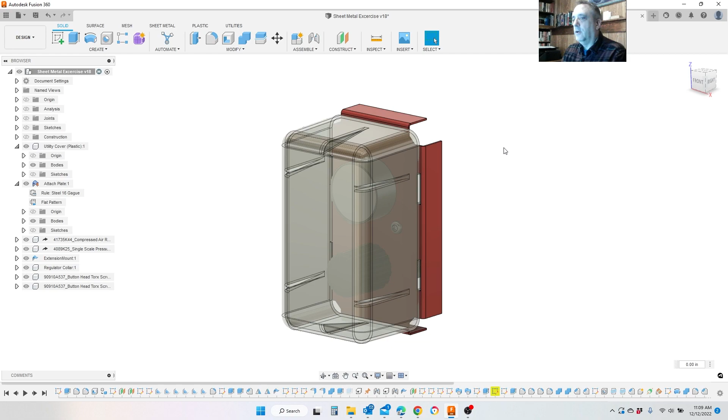All right, so what we have here is this design that I've already done. Basically what we have is some sort of manifold here that is attaching air inlets and outlets through a regulator and a regulator pressure gauge. There may be another gauge, of course, on the other side, so it shows the pressure coming in of a tank or etc. But this is just an example of covering this part of it.

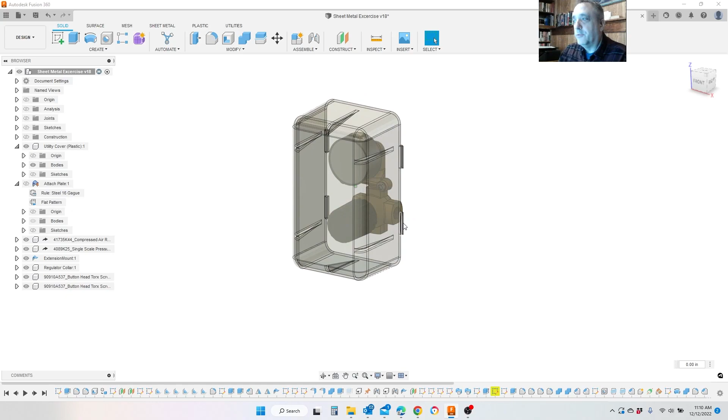And what this also has is there's a cover that goes over the top of it, and it has these little tabs here that are coming out to help kind of just engage it. So we have to make a part that can fit around these parts and be able to be this cap to attach to it. So that's what we're going to do today. As you can see, I've already come up with one, but we're going to go through this process to do one ourselves.

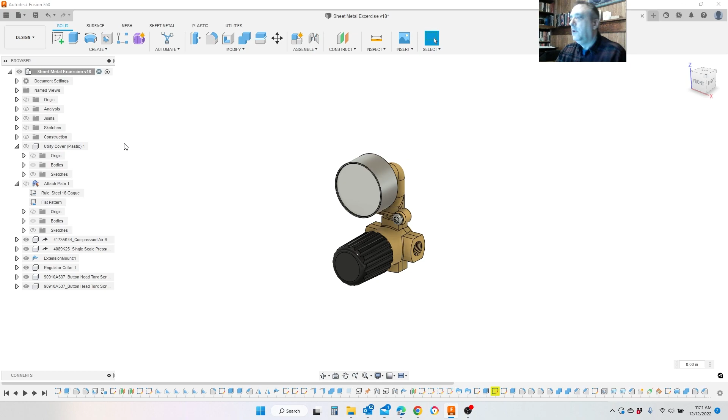So there are going to be some dimensions we need to know. We need to kind of know what the dimension is of this back part, so this can feed through. What the diameter of this pressure regulator is, the diameter of the screw holes and things of that nature. I've measured all that, so we'll start to put those things in parameters. And if you know me, I like to use parameters.

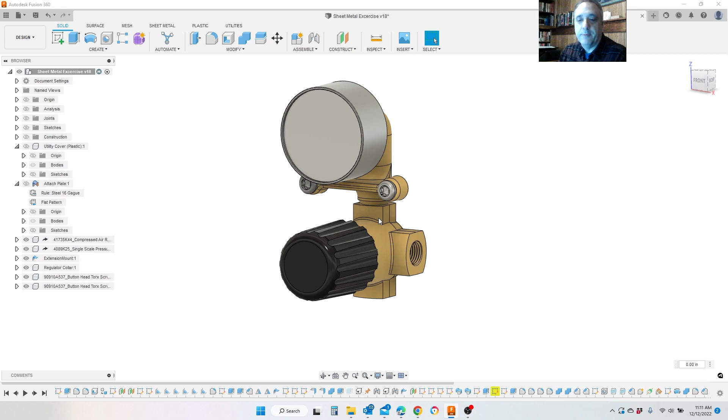Using parameters makes it easier for you to modify designs without actually having to dive into the actual drawings after the fact. Another nice, interesting aspect of parameters too, and even dimensioning in Fusion 360, is you can use equations. So we might use a little bit of that, but not a whole lot.

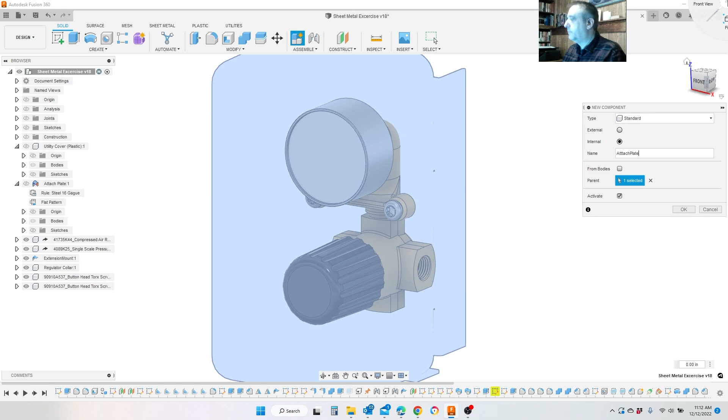So the first thing we're going to do is we're going to just define some parameters, but what I want to do is within this exercise, I'm going to create a new component. And I'm just going to make this part of the main sheet metal exercise. So here we have, and now we have that as our active component. That's mainly where we'll be working.

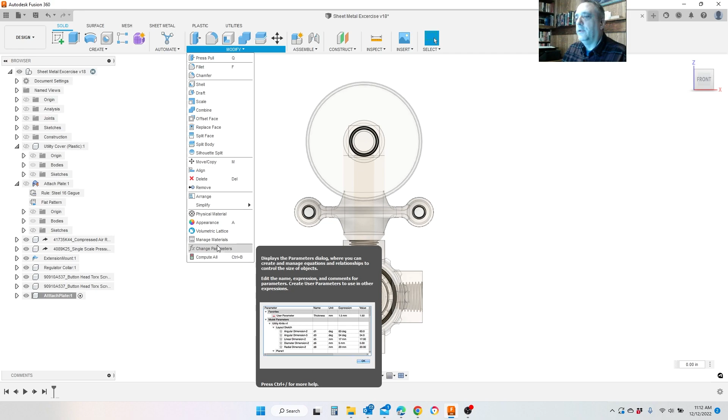So the first thing is under modify, we're going to do change parameters, and this is where I'm going to define parameters. If you've watched, I'll probably show it at the end, but I do have a parameters exercise designing a grommet you might want to watch.

But one thing to keep in mind is after you start defining some dimensions in a design and you haven't parameterized it yet, you actually can go into the model parameters under this setting and start giving them names and defining them, and then physically changing them within here. So if you don't start out that way, you can start to add them at a later time. But first, what we're going to do is we have several parameters that we need to define. I had to write a bunch down, but we'll get them in there as we go here.

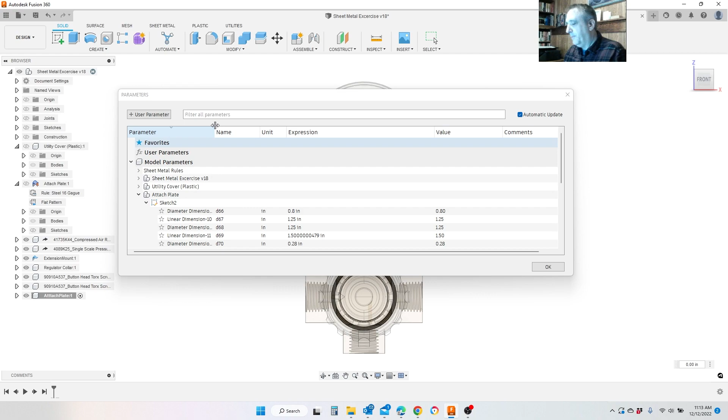So we're going to add a parameter, and this parameter is going to be flange height. Flange height is going to be the actual height of one of the flanges on the sheet metal part, and it's going to be 1 inch. So we know our hardware. The screws that are going to attach to that manifold are 1/4 inch screws. We're going to put 0.25. You say, hey, yeah, you need to oversize those. We'll account for that. But right now I'm just putting 0.25.

And then another parameter is going to be the dial diameter. This dial diameter is a diameter that's needed to get that dial through there. And you saw that it was square. I actually made it round. You could kind of make it square, but it would have to attach differently in that case because it threads on, it has to screw.

If it was square and it fit in there, then that manifold would have to be designed differently. So I just made it round. That is 0.80 inches. And the same with the regulator diameter. I measured that. 1.25 inches is enough for that to sit nice.

Let's see here. The other thing we need to know is the height and width of those tabs that are going to lock into this. So the tab height is 1 inch. And the tab width is 0.18 inches.

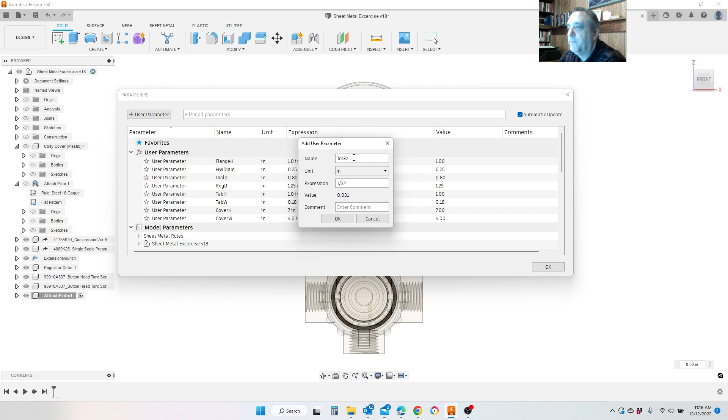And then another parameter we'll need to define that's not necessarily in here is the thickness of our sheet metal. So we'll get to that. As you know, the other thing I like to define is some sort of tolerance. So I'm going to call tolerance 32. That's going to be 1/32 of an inch. And then I'm going to add another one called tolerance 64, which is 1/64.

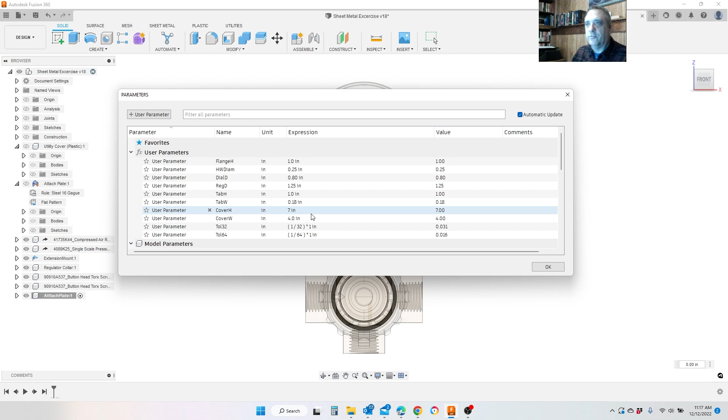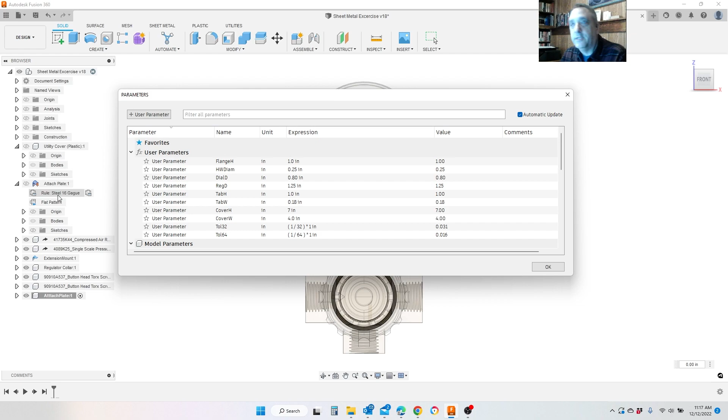Don't know how much I'm going to use these, but it's always good to build in some sort of tolerance. In fact, I know where I will use it is in that hardware diameter. There are a couple other dimensions on just putting things in the right location. Won't define those right now, but we'll define them later. The next step will be to start designing the patterns and things of that nature, and eventually defining the steel gauge. The steel gauge in this case is going to be 16 gauge, roughly 0.06 inches. So we'll get to that point.

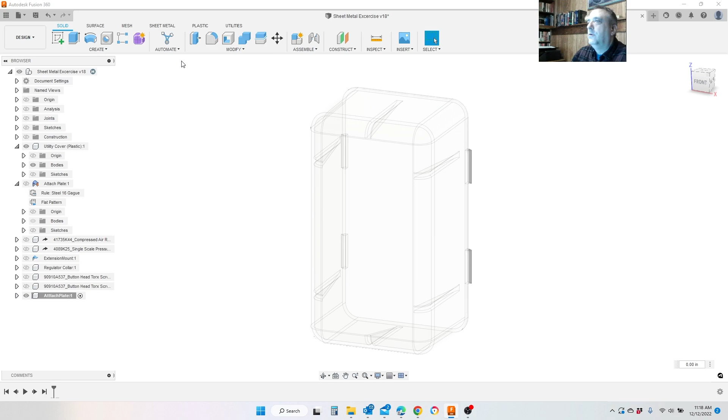All right, I'm going to turn off all of my extra stuff here, except for this utility cover, and it's very faint on my screen. It is clear, so it's showing up even clearer than normal, but we're going to use that to define some of our boundary and understand where some of our features are at. So first thing that we're going to do is create a new sketch, right at the boundary of the bottom part of this plastic cover, which happens to be at that axis.

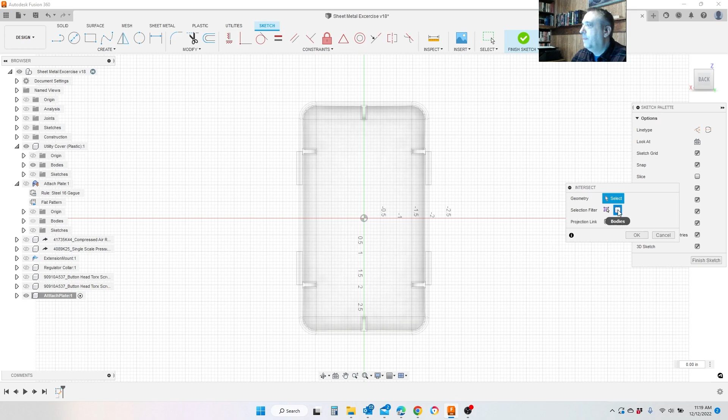And instead of defining the height and width of this box, I'm just going to create, project, intersect, solid model. I'm going to keep that link, and I'm going to grab those lines. So I've grabbed all those different lines that define the outline of this plastic cover. So we can then just turn this off so we can see what those are. So we've got that outline already.

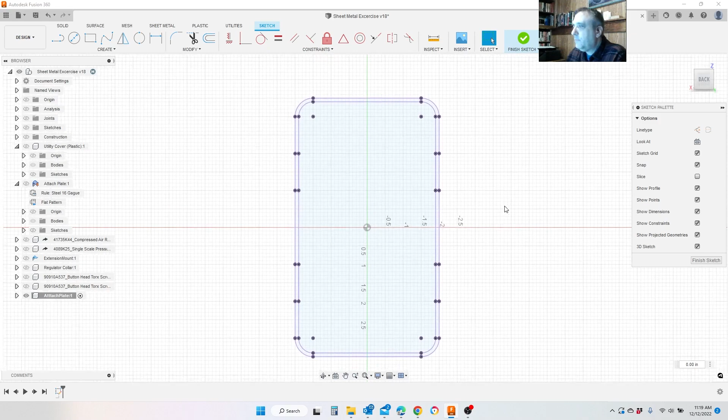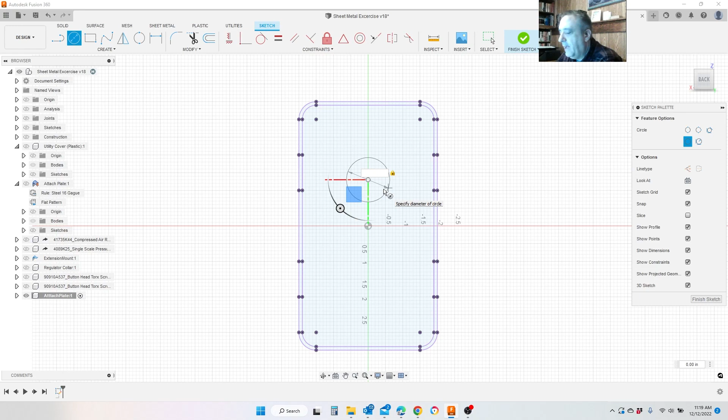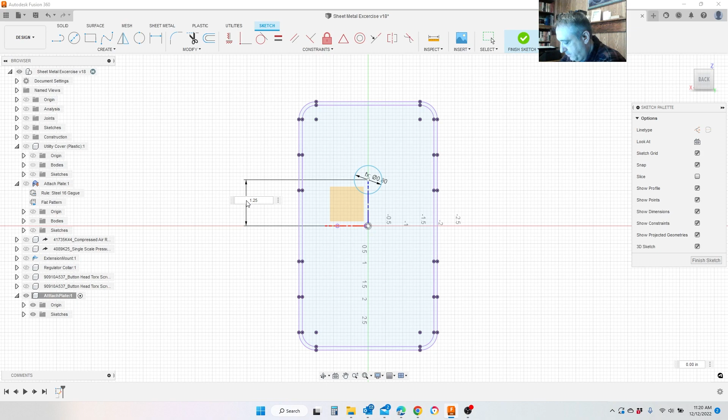So that's good. We have some features that we need to define on this that we're going to be cutting out. One is where those tabs are going to be fitting in and where those holes are going to be at. So let's do the holes first. So right up from center, there's going to be a hole, the dial diameter. Let's make sure our axis is showing so we can reference off of this. Sorry, it was 1.25 above at 0.8 diameter.

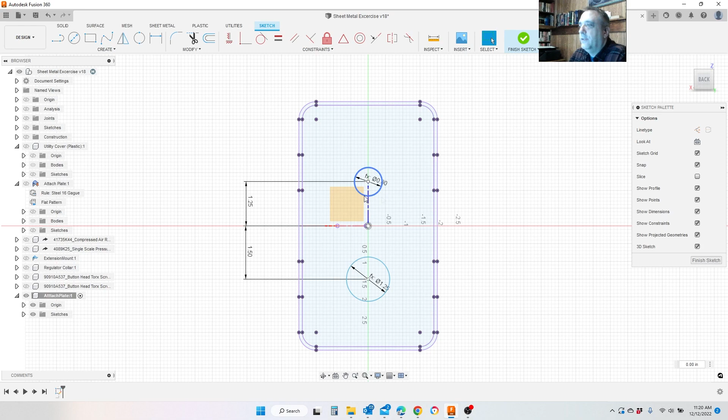And then we're going to do another one below, which is going to be the regulator diameter, which is 1.125. And this is going to be 1.5 inches. Now you'll see that I still don't have a defined circle. This is because I can move this still right to left. I have to define it off this axis. One of the easiest ways to do that is just to create a reference line center to center from top to bottom. And then we're just going to make these collinear. And then we're going to do the same thing.

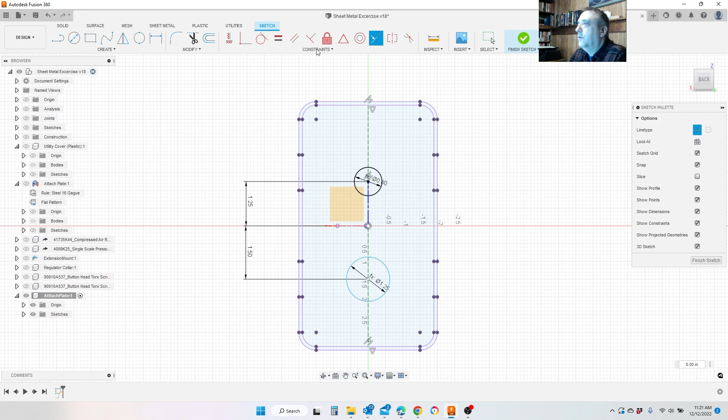There we go. So we have those lines defined. So we have a spot for our pressure dial and a spot for our regulator. Now it's the hardware locations, which are just right along here. Turn off the line type, make sure we have a regular line. Now you can do this as a point and a hole, however you want to do it, but since it's not a threaded feature, I just like to do a regular circle.

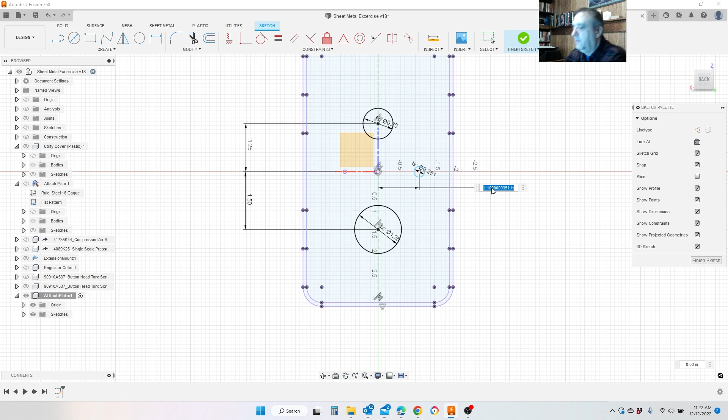So this is a hardware diameter, but plus Tol32, 0.281. And then again, same here. We're going to define the distance. This is from here. That distance is 1 inch. And just like the other one, we should put a reference line from center to center. And then we can make this collinear.

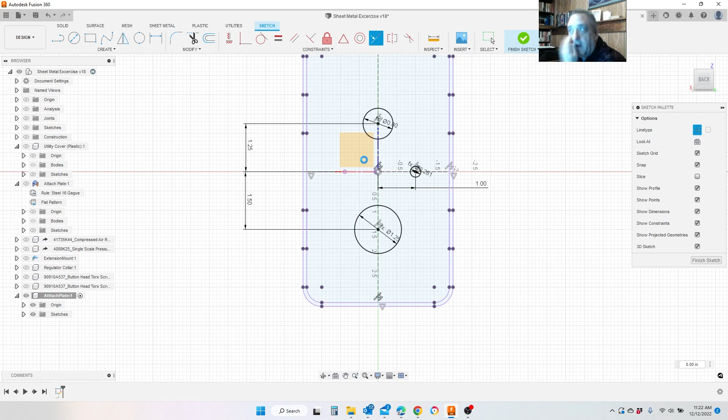And it'll be defined. The other hole could just make that, but what I'm going to do is I'm just going to mirror it. That way, if I change the diameter, it will change the other diameter in the right location. So I'm just going to save this. All right, so we have our holes defined. And we don't need these quite yet. We will get to those in a little bit.

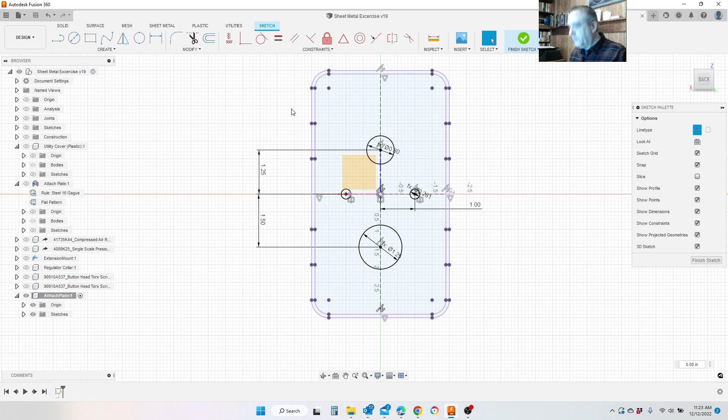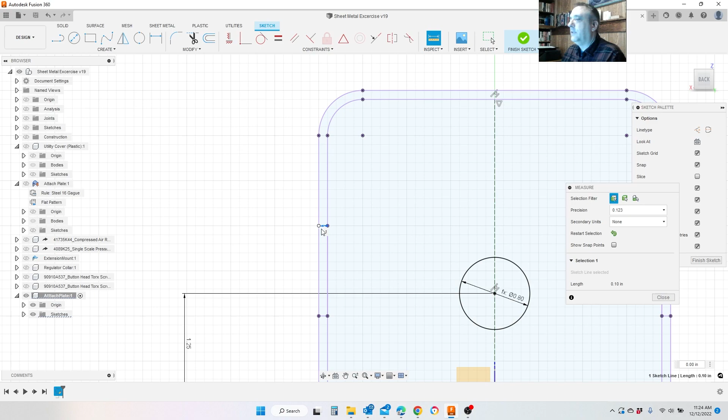But the next thing we're going to do is the flange, defining this flange. So this is a unique feature. Profile right here, and that's the width of that intersection that was there. It's not necessarily the total width of the flange itself. If you remember when we did the tablet was 0.18 inches. If we inspect this, it's actually 0.1 inches because that's a narrower part.

That's part of that flange, but the biggest width of that flange is actually 0.18 inches. And it goes 0.18 inches from this line out to here. But I need to have a little overlap for it to hook into. So we're actually just going to make a profile. Probably should not have that. And we're going to add 0.04 to it. And now 0.04 on both sides. This should be 0.18. So it'd be just tight enough to fit in there.

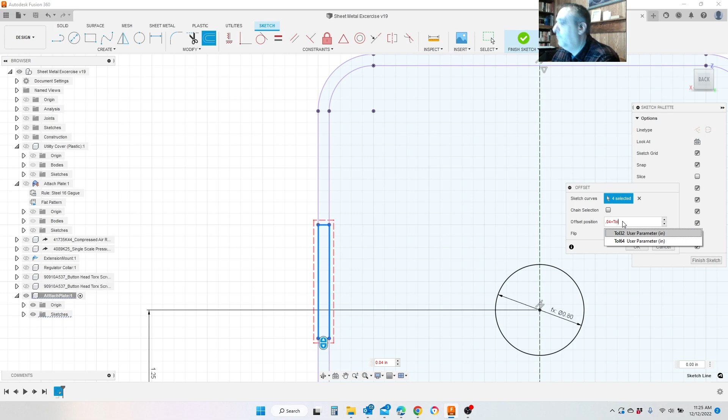And in fact, if we wanted to, we could add a little bit of a tolerance. Let's do 64. And I did not want this to be a reference line, so let's just change it back to not being a reference line. Now I have that, and I have this in all four corners. Nice thing is it's all symmetrical, so we can just take this and we can just do a symmetrical.

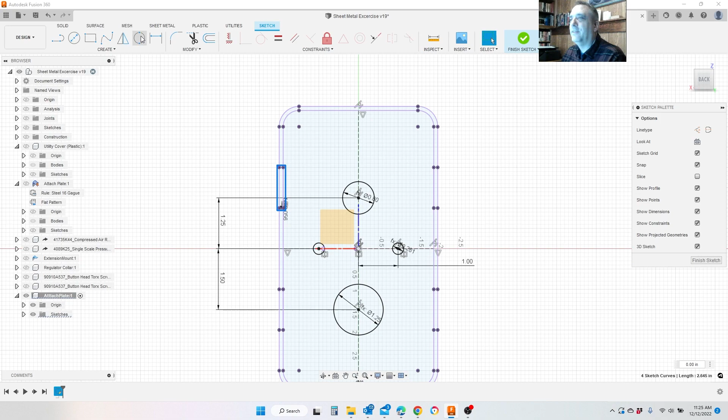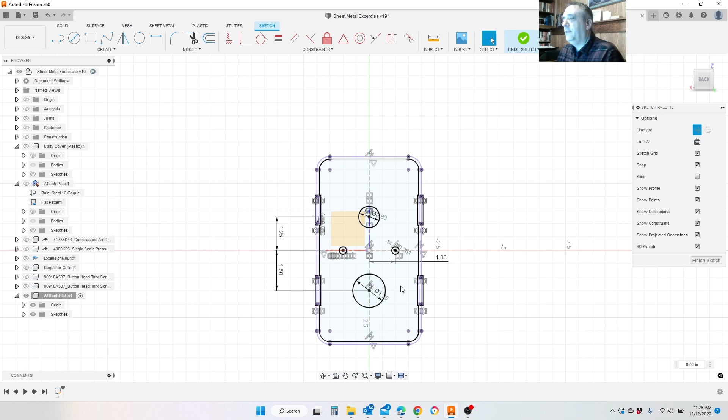So we defined all that geometry. The next part is we're going to create different flange geometry to actually create the flanges in the sheet metal part. Now we're going to need a new sketch. And this outside face from this side is where our utility box is. And our flanges are going to be down on the other side. So we need to create a profile from this direction and this direction and this other direction in order to create this.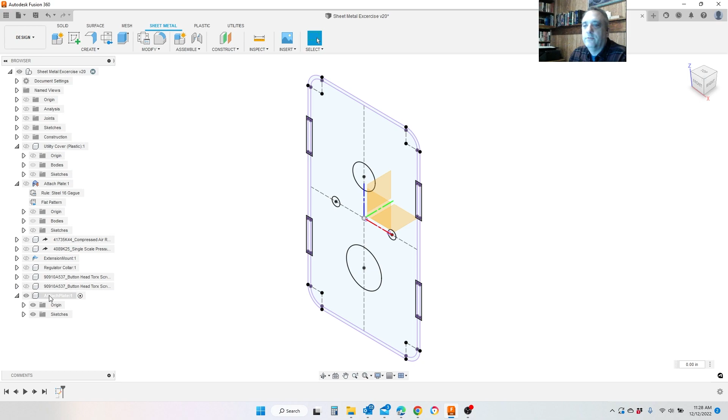But before we do that, we want to go into sheet metal. And we are going to create a sketch while being in the sheet metal design space while we are in this component, the attach plate. So now we're going to do our geometry from here. So we're going to need to do a drawing that can be right in this midplane. So let's start here.

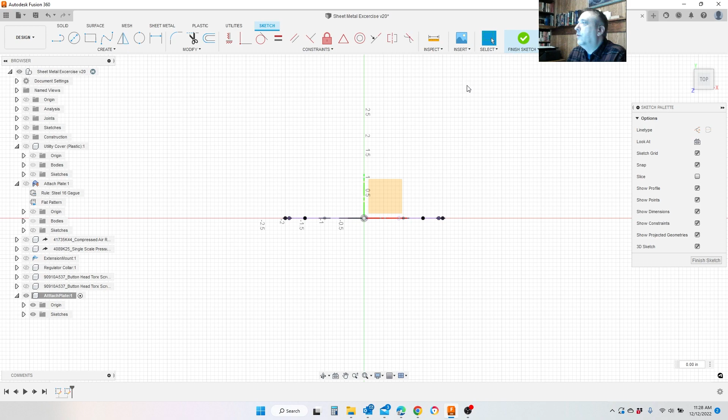And we are going to do, those are reference lines. Okay, so let's do this. I'm going to go out to here, here's where I'm going to need it. Cover width divided by 2 plus overlap.

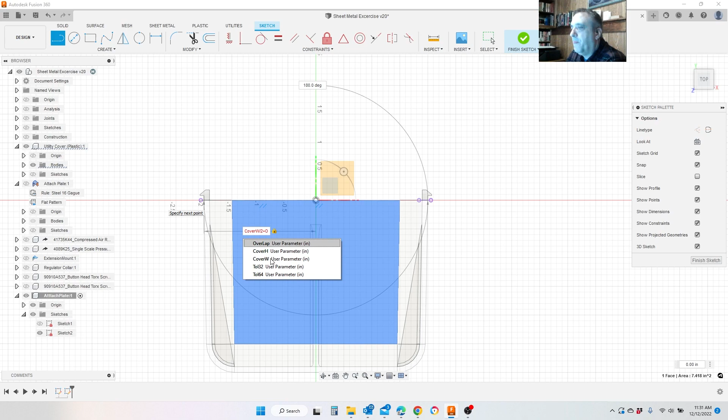And then we're going to do this up, and this is going to be flange height. And since I only did half of it, we're going to mirror it. So let's turn this off.

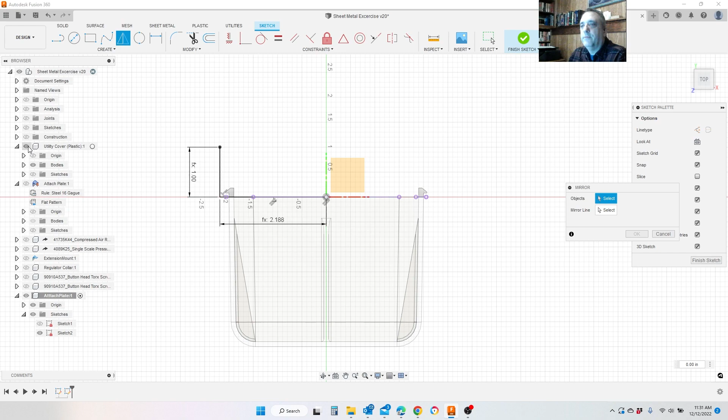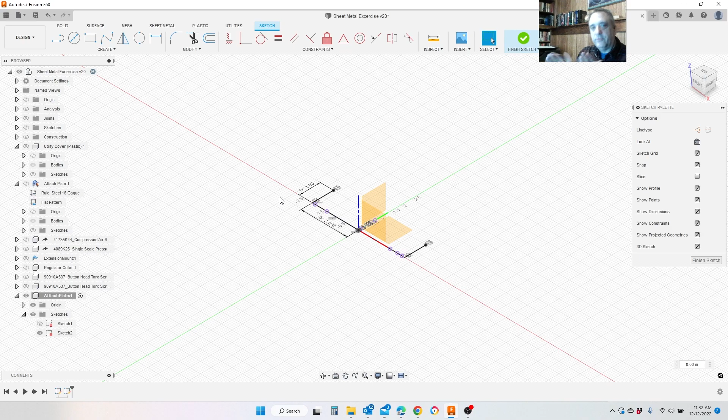Okay, so I've created a very basic profile, corners and all, no radiuses, nothing, with what that basic shape of the flange is going to be. But I'm not only going to bend this around 2 sides, I'm going to bend it around 4 sides. So we also need to finish this sketch. And if we bring this cover back in, you can see how this is going to create a sheet metal flange in this direction. Well, we also need to do one in this direction.

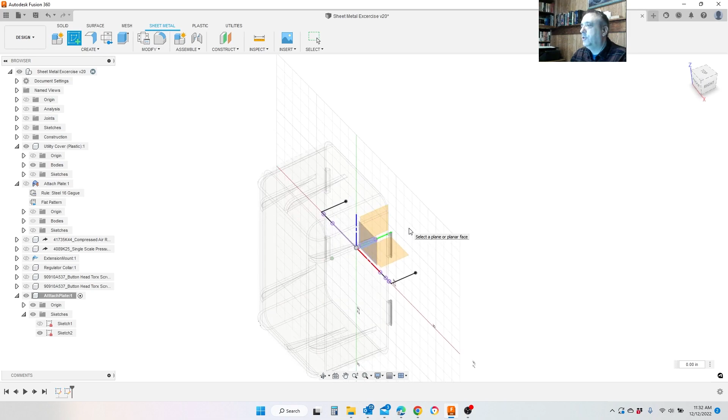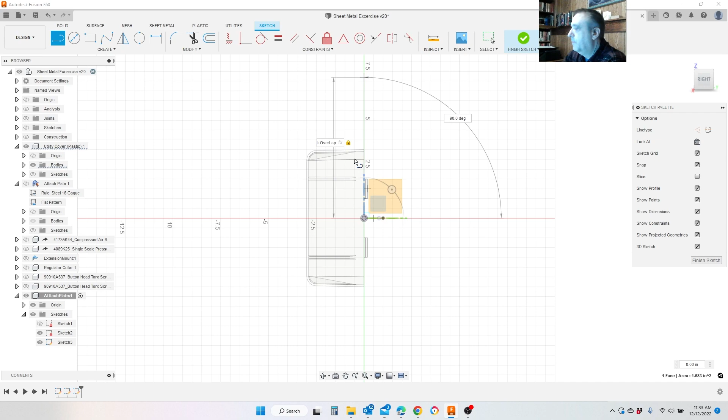So we're going to do a new sketch along here, and we're basically going to do the same thing. We're going to go from center up, and this is going to be cover height plus overlap. Oops, sorry, cover height divided by 2.

Finish sketch. So here you can see I have 2 sketches. Usually when you're doing sheet metal, when you have a simple profile like that, you basically are just going to do that profile, you're going to extrude it. You can add hole features on the flat pattern or on the shape itself. You do have to keep in mind though, even flat pattern algorithms take into account stretching and things like that on where the part goes. So if you add your features to a flat part and then you bend it, those locations might change.

So it's better to add the features to the bended part and then flatten if you can. Some complex holes and geometry might have to be put in on the flat pattern, like if you have a slot that you bend right in the middle of. But here I have flanges in 2 directions, so you have to do both of those operations and then combine the part and then flatten it out.

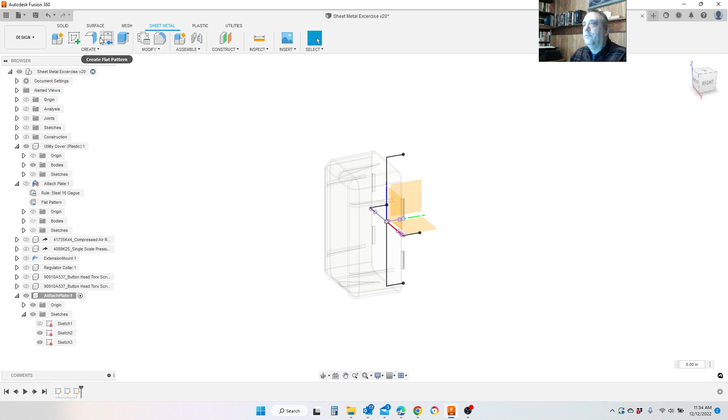So we're still in the sheet metal part, and so the next thing we would do is we're gonna create a flange. But we do also want to make sure that we have the right rules in place. And I'm going to just create this part just the way it is right now.

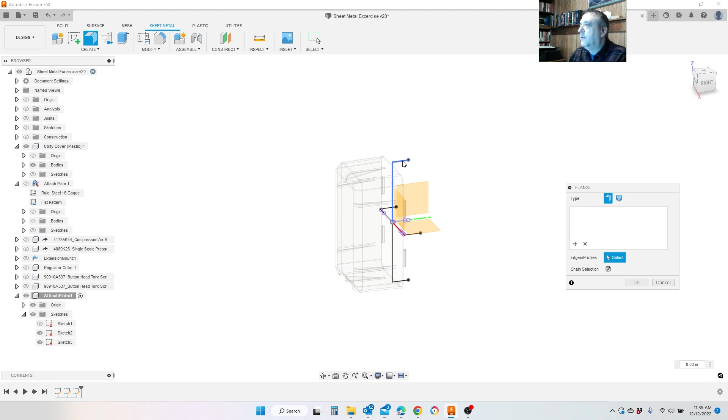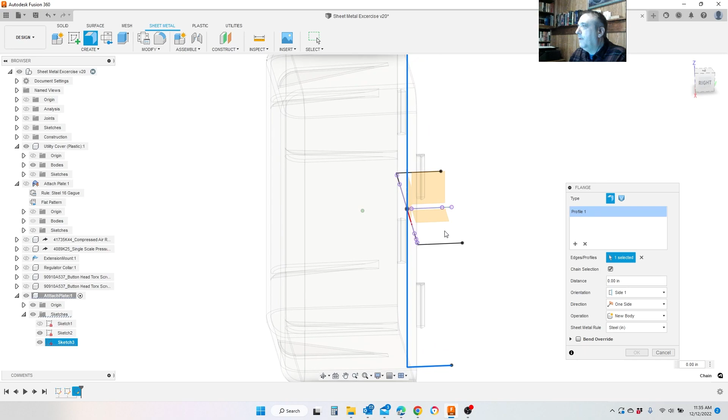First thing is I'm going to create this profile, and you can do a chain. If you do chain, it's going to go to a certain point, try to do the whole thing. Now, once I have the profile selected, you can see that it has an arrow on both sides, and there's a couple different settings you need to keep in mind.

We're not going to talk about lofting edges at this point, but just straight up just doing sheet metal. So one is the distance. You can define the distance in which you want to pull this part, and you can see it automatically creates the radius, it automatically creates the thickness. And we haven't set those settings yet, but it's defaulting to just the regular default rule and the distance. But just like any solid model, you can also do it on 1 side, 2 sides, or symmetric.

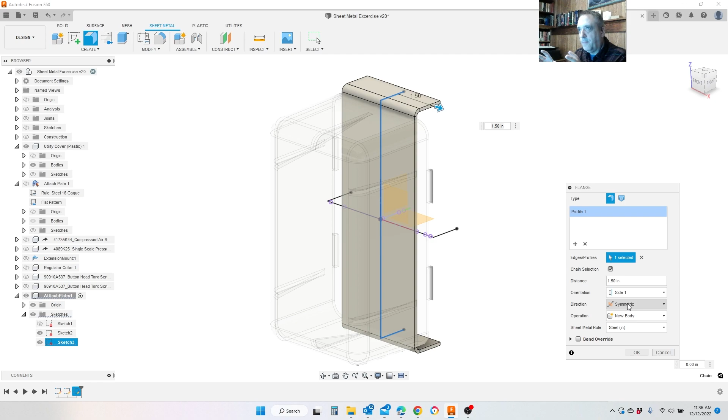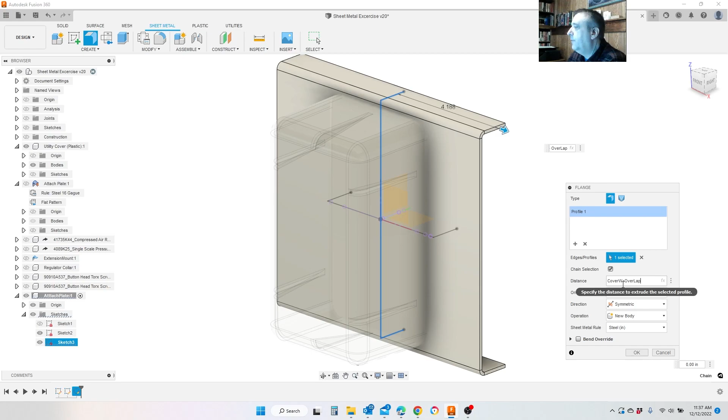We're going to actually do it symmetric, and we want to do it that total distance of our cover width plus the overlap. So I put that in, and then we can actually put that definition in here: cover width plus overlap. And I do need to divide this by 2 again. Unlike in the solid model thing where you can do a solid model, it's symmetric and you can define whether it's the extent or on each side, this does just symmetrical the total width.

We are going to create a new body at this point in time. And here you see the sheet metal rules, and there's different rules in here that are defaults: steel, stainless steel, aluminum, steel, inches, millimeters or inches. I have a predefined steel 16 gauge that we can pick.

There is a place we'll get to, I'll show you, where you can define your own things. Now I will say this, I haven't figured it out yet. These rules are per drawing, they're not per the system, so you probably have to go into a library or somewhere to define the actual gauges that will show up all the time in all of your drawings. So this is specific to this one.

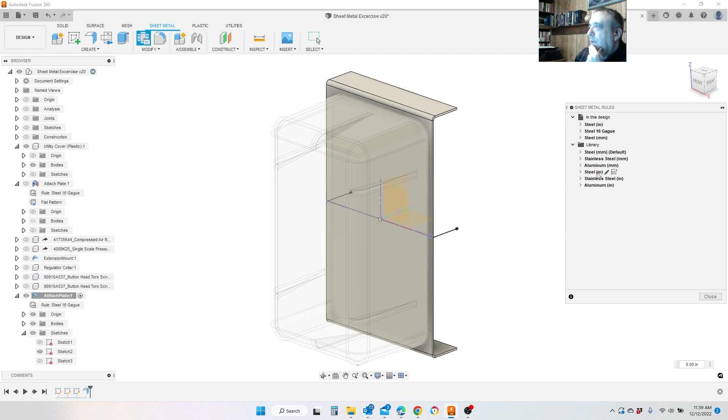So if you want to modify the sheet metal rules, we can go to modify and click up here, right next to the fillet. Here's where you see what's in the design and what's in the library. You can go to any one of these that's in the library, let's say steel inches.

You can say this is my thickness, this is my K factor, and then just leave thickness the way it is. I usually put the name 16 gauge or something in here. You can give different bend radius and settings and ways that you want to do that. I don't normally touch these.

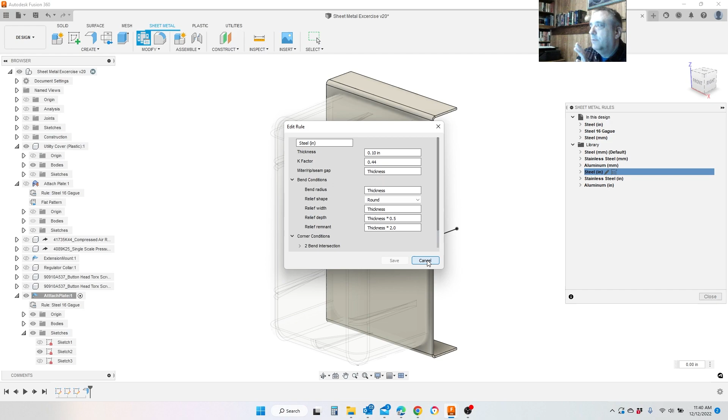There are books on sheet metal where you can get the K factor you need and the recommended one of these, but for now, for what we're doing, I think it's fine. That's how you change it and create your custom rule. Now we need to do the other profile.

We're going to do the same thing, this time for cover height. I just realized that I have a problem here.

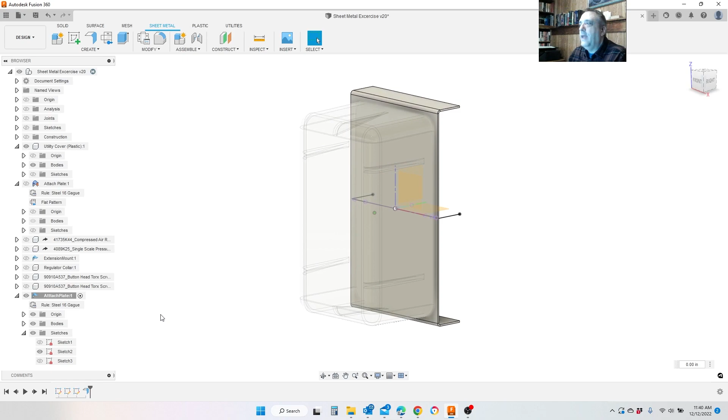So what's going to happen? I'll actually show it so you see it, because you obviously can't bend things into really close corners.

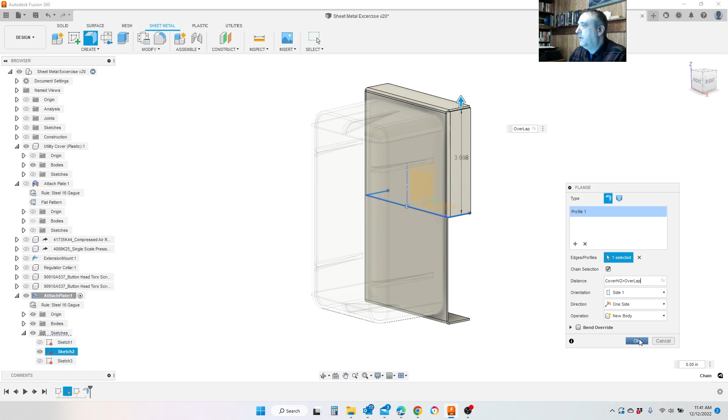So let's just do this just so you see what I'm talking about. Let's do cover width. We'll just do a new body, so you'll see how close this is.

We're actually going to merge these together, but we have to create offsets so they don't meet exactly in the middle. So we have to leave room in there.

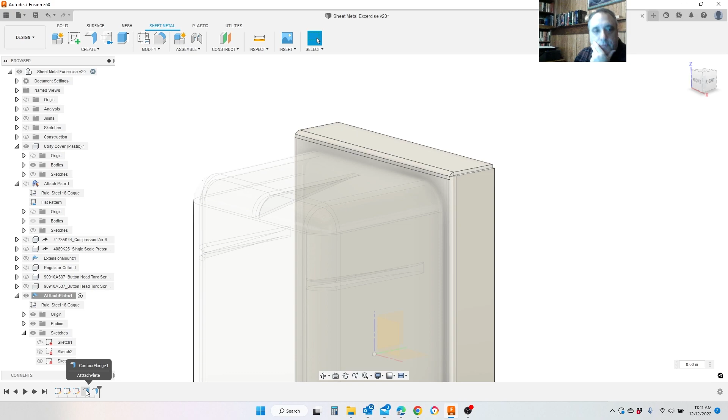Let's change our sketches, or not necessarily our sketches, but the distance that we pull those flanges. Down here in the history we're just going to right click and edit this feature, and get rid of the overlap part, because we did account for the overlap we needed when we defined these flanges.

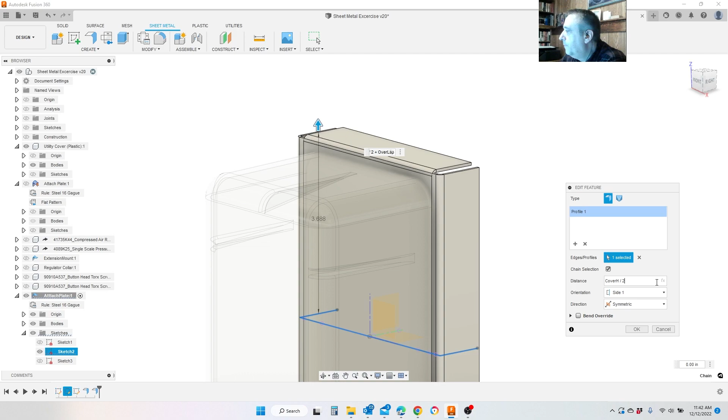Let's do the same thing with this one. We're going to get rid of the overlap. Nice, okay.

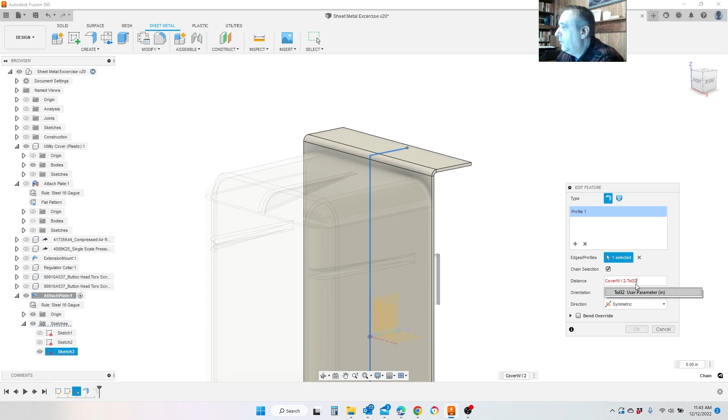In fact, if we want to even give it a little bit more, we can do it Tol32. And the same thing, Tol32. Okay.

Now we have two bodies that are, as you can see, sheet metal parts. So if we combine those - under modify there is no combine here. You actually have to go back to solid model and go to combine.

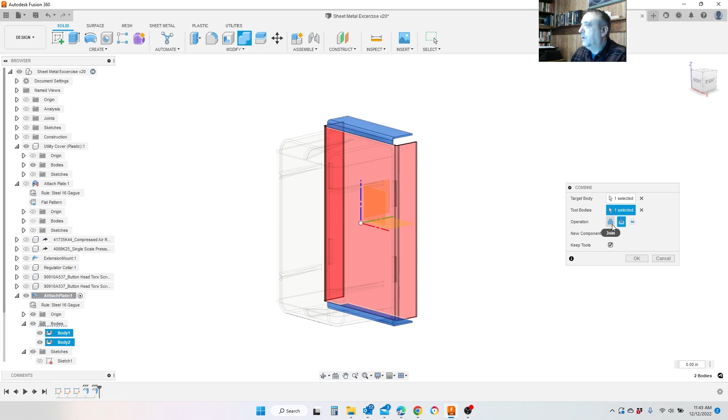We want to combine them. We do not need to keep both bodies, so we're just going to not keep tools. Now it's created a single body, which is still a sheet metal part.

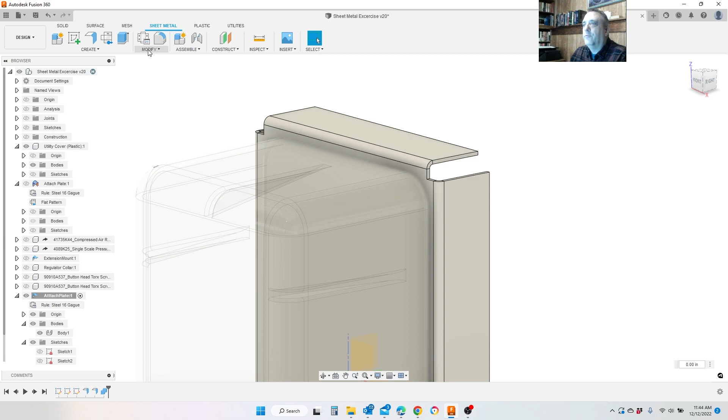I would like to now do some modifications, putting in the holes and everything that we need. First thing, we're going to put a couple chamfers in here.

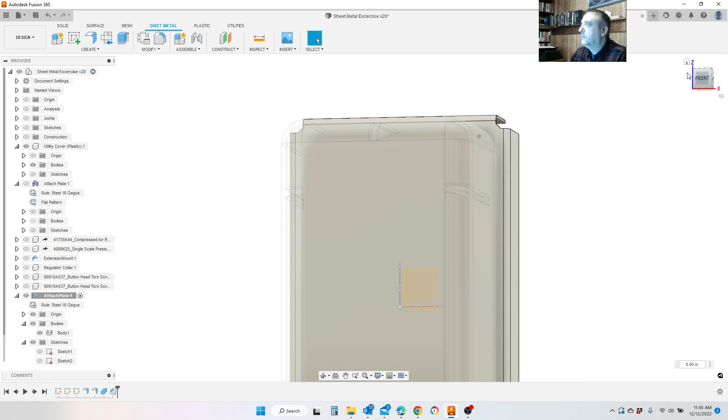Now we still have this other sketch. We're still in sheet metal. We're going to extrude, and let's go to the back side here for all of our holes.

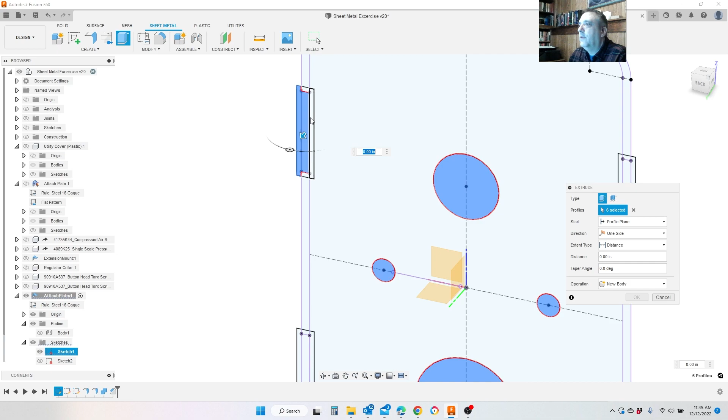Let's remove our body for now so we can see what we're picking. We want to get all of this. So here we have basically our part.

Before we do the flat pattern of it, let's just give it some color, physical material. I do recommend that if you know what metal you're going to be using.

I'm picking metal, and it's going to be steel. I don't know what kind of steel, so we'll just do steel. Drop that on there.

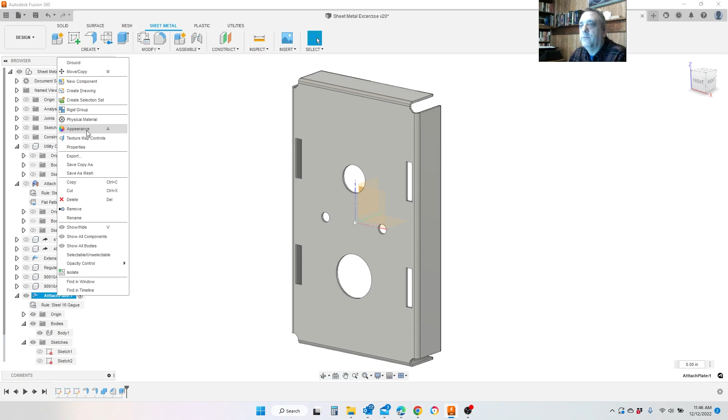Close, and then let's say we're going to paint it. The appearance - instead of the red like I did before, here you can just do different textures and things like that. But let's say we're going to make this green.

Or maybe it's a regulator for oxygen. I don't know.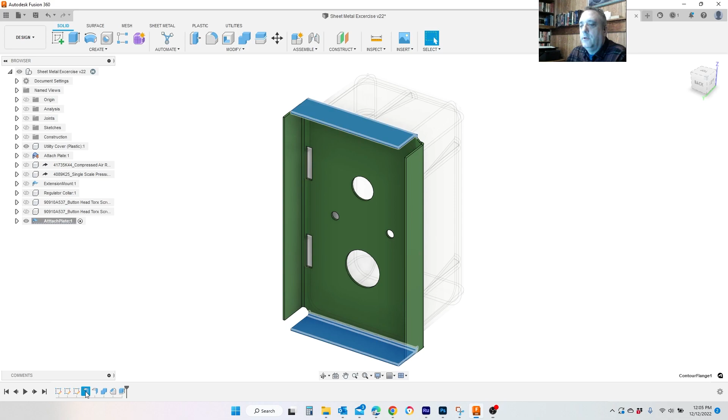One of the other things you want to look at closely is this setting where it says side 1, side 2, or center. This is defining on what side it's going to put the material—on side 1, the top side, side 2, the bottom side, or is it going to center over the two?

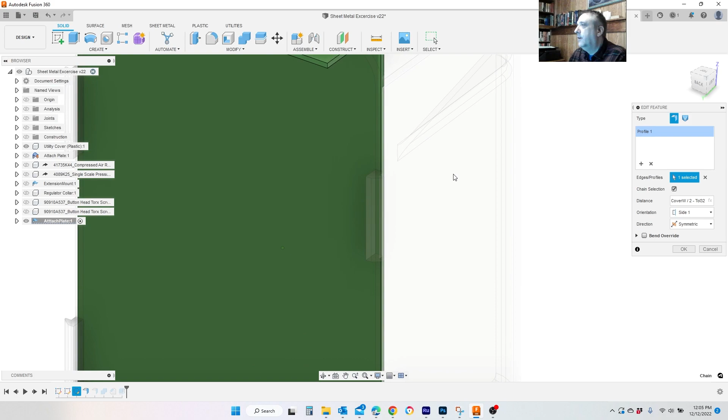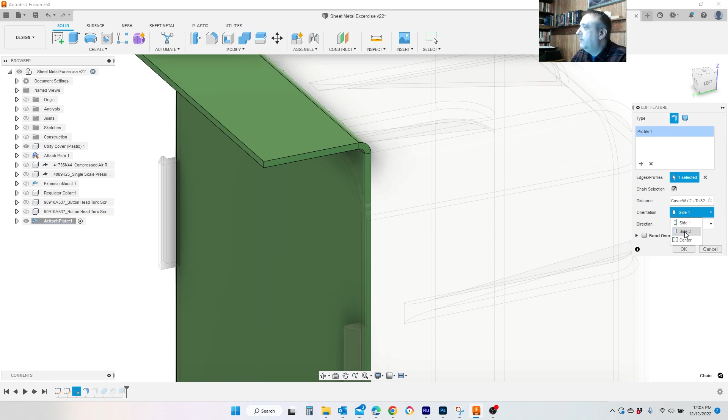As an example, if we select side 1, you can see that it's actually pushing up into the cap. That's not overly important because this cap moves back out of the way—it's not a solid piece, I'm not building it into anything. But if I select side 2, it pushes it down on the other side. If I do center, it's going to make it symmetric.

So if we go with side 2, it's going to do this. Let's make sure they're both side 2s.

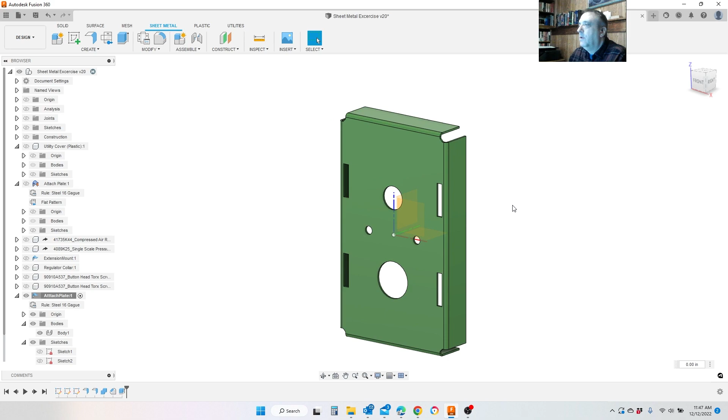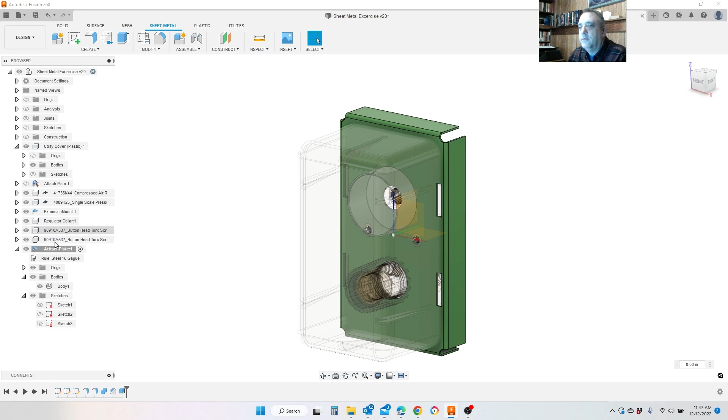Let's bring in our other components and see how things line up. So we have our cover—we won't do this attach plate, that's the old one. We have our regulator, collar, hardware. Let's turn this one on. So here we have our cover. Everything seems to line up.

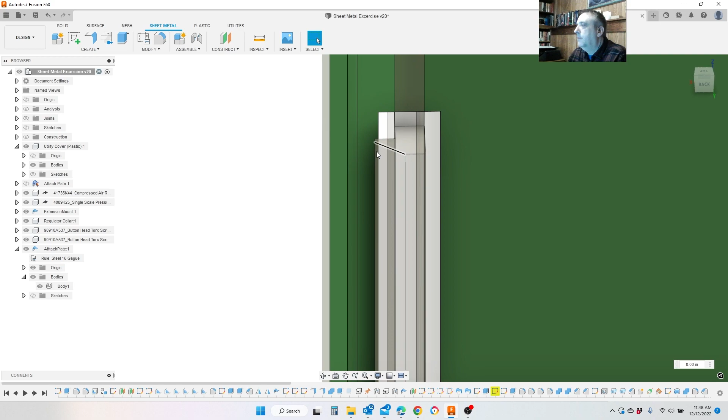You can see here where this is wide enough for it to get in, but there's a little bit of overhang for it to grab. Could we make it a little bit smaller? Possibly, but it should be enough. We want to just squeeze it a little bit to get it to pop up.

Next thing is we want to create a flat pattern of it. Once we're active in this body, we'll select flatten. It's going to say select the face that we want to be stationary—this is the face that's face down, like imagine the sheet of metal, it's the face down part. You want to be face down. That's this face. Do OK.

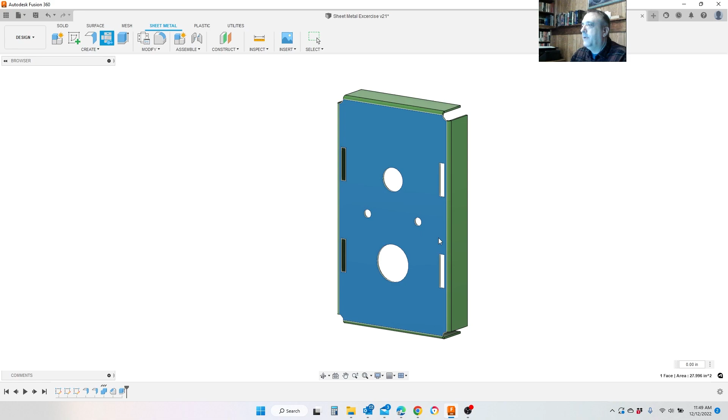So you'll do a drawing and you'll want to define the thickness of the material, the type of the material, the finish if there's any, not necessarily finishing at that point, if there's any processing that gets done afterwards prior to it. But you will need to say that this is this radius bend, 90 degrees, because you can do bends—we could have made those flanges instead of 90 degrees, maybe 85 degrees or something like that, and then you'd have that kind of bend.

But that's your basic flat pattern, and I will give a link to an organization where you can send them a step file of a sheet metal part, and it will flatten it out for you. You can say how you want it finished, and they will cut them out and send them to you. It's a really nice organization. There's a few of them out there, so maybe I'll try to hunt down a few of them.

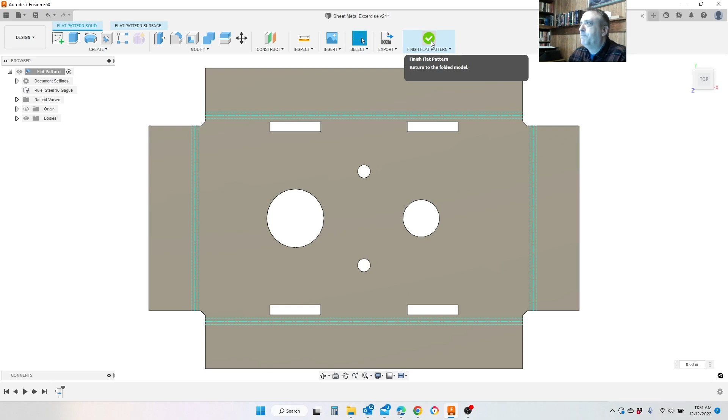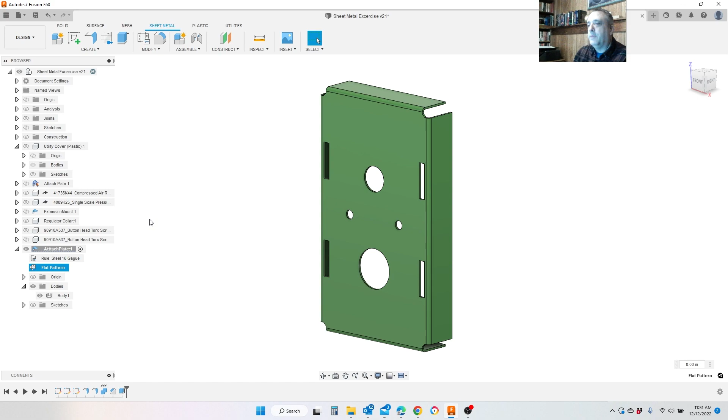Yeah, so that's really the basics of creating a flat pattern sheet metal design in Fusion 360, especially doing it around the design of other components. I'll give you some examples of these components: the compressor,

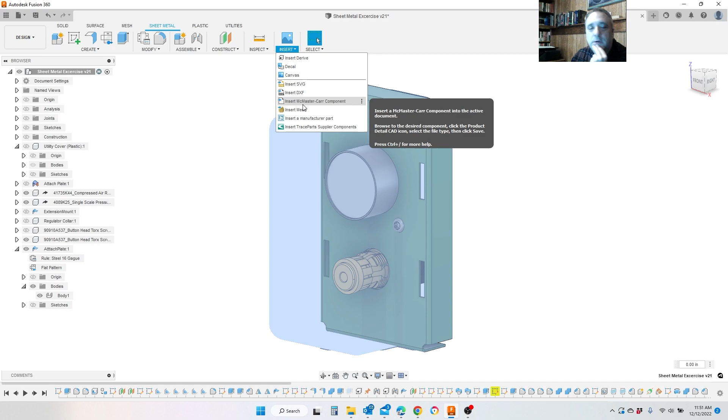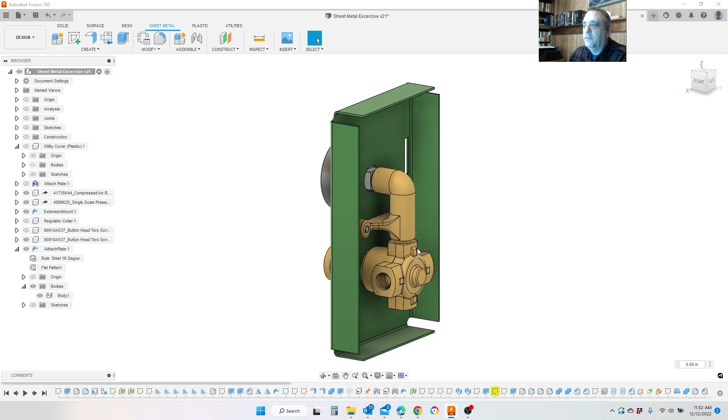regulator, the dial, the fasteners—all of those parts I got at McMaster-Carr, which you can actually import directly into Fusion 360. You can also get files from other sites and import them—they have some other part companies they can work with. And then I actually went around and physically designed this manifold myself to fit into these, using these as references for the design.

So yeah, that's sheet metal design.